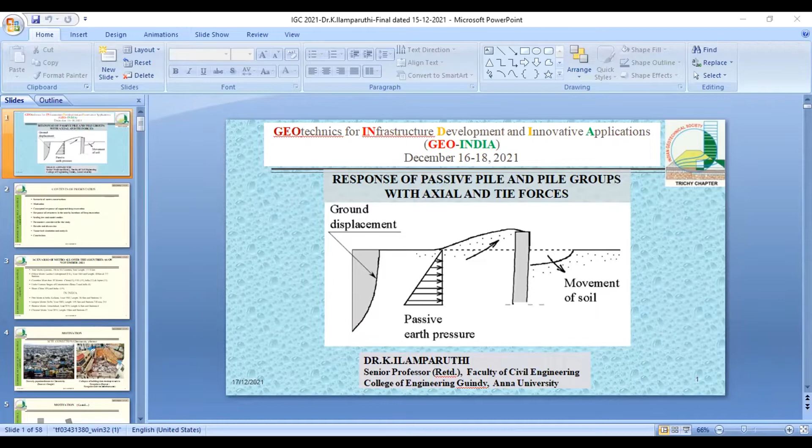Can you please check the screen, sir? Which screen you want? Otherwise, you can share your whole window. Then you can open the PPT in the full screen mode. In the share option. Can you see the presentation now? Yes. From there you start the show mode. Now can you see full screen? No, it's not coming. What I suggest is you go ahead with your lecture. We can enlarge the screen to see your slide full on our screen. Okay, this might help a lot. Can you see the full screen? Yeah, now it's fine. Okay, now please continue.

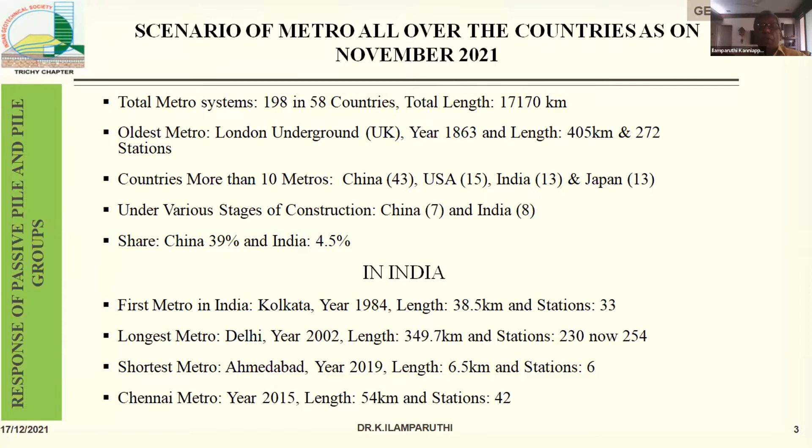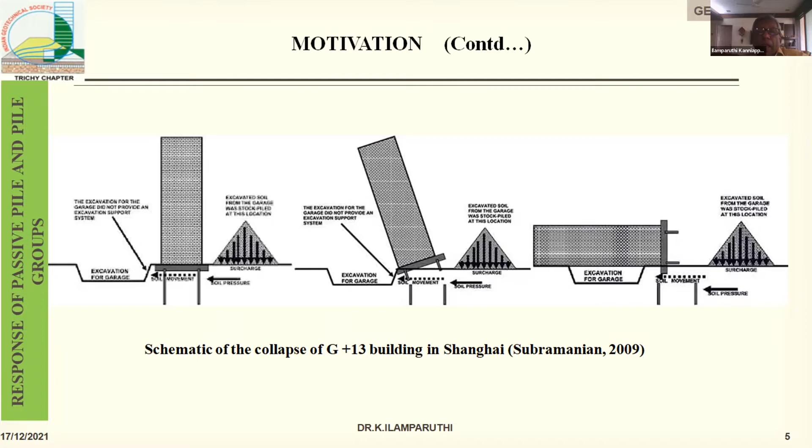And then in Chennai, during the time of construction of the metro, on a weekly basis, there was a lot of news in the paper about the problem. Metro rail tunnel has damaged 300 plus buildings since mid-2012. Similarly, there was another report that Tamil Wesley Church, a 152-year-old church, has given away. And then I had the chance to advise the owners of the church.

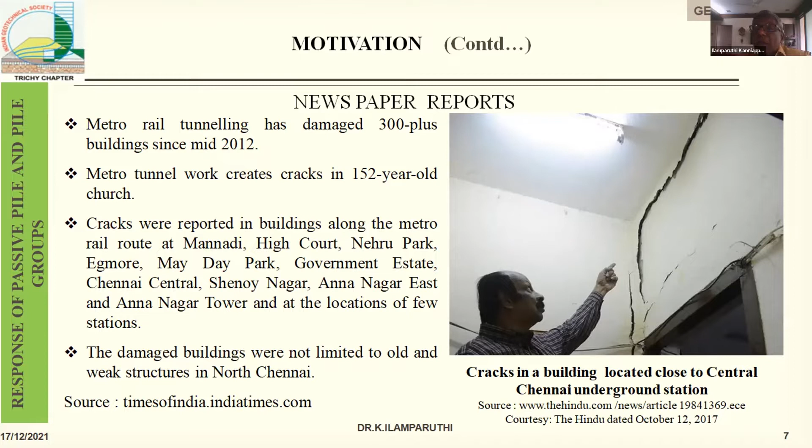I had an opportunity to offer my support through the subcontractor. This is the building. It is a ground plus first story building. In order to drive the sheet pile wall for protecting the building, initially they were not able to drive the pile because the soil is hard on the top layer. They drilled a hole to a depth of about 5 to 6 meters for the purpose of driving the sheet pile wall. The initial crack was formed on the floor, and then the soil exhibited the failure as shown here.

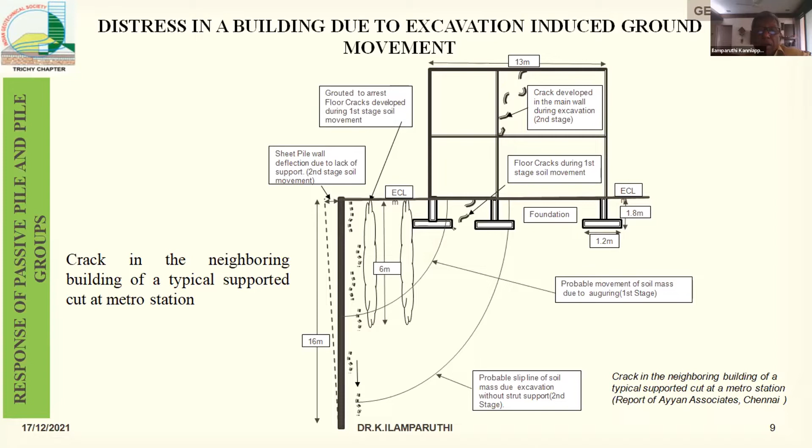It is a probable movement of soil mass due to augering as a first stage. Without having proper knowledge, they have grouted the soil to a depth of 6 meters without giving any prop or strut to the sheet pile wall. Sheet pile was driven and excavation was commenced. Again, you see the probable slip line of soil mass due to excavation without strut support during the second stage. These are all the reasons that have motivated us to study the performance of passive piles.

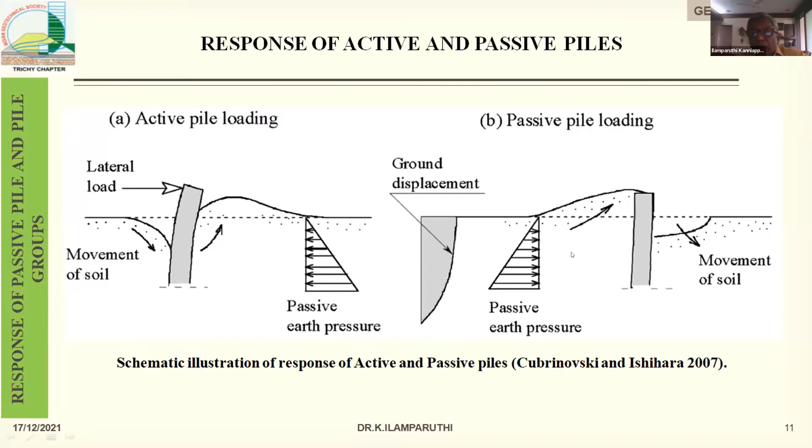This is the figure which shows the ground displacement on one side, but really the problem of deep excavation is, we are going to excavate here. Therefore, there is going to be a stress reversal. Whatever is shown here, it is going to be totally reversed.

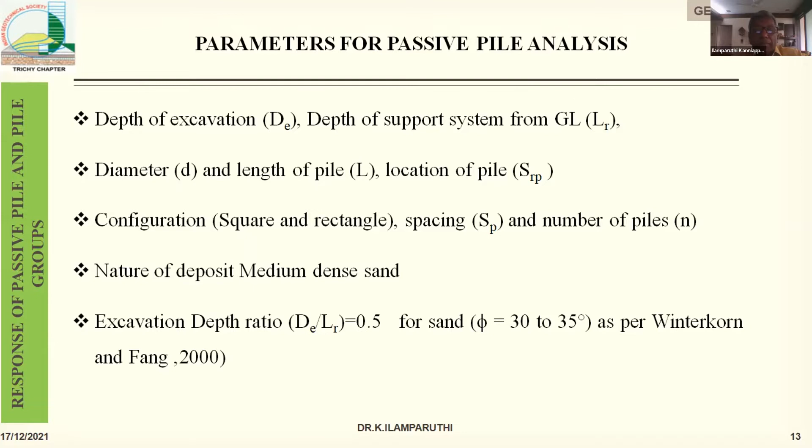We all know there is a scaling problem in case of 1G model. The stiffness of the soil pile system depends upon the stress. The stiffness is equal to sigma to the power alpha. Wood suggested a model. He has given the stiffness response EM by EP is equal to 1 by n power alpha, sorry, this is going to be 1 by n power alpha from the experimental findings of 1G model as well as the prototype. With the experimental evidence, he recommended that alpha value can be used as 0.5 for sandy soils, and for clayey soils, alpha value can be used as 1.

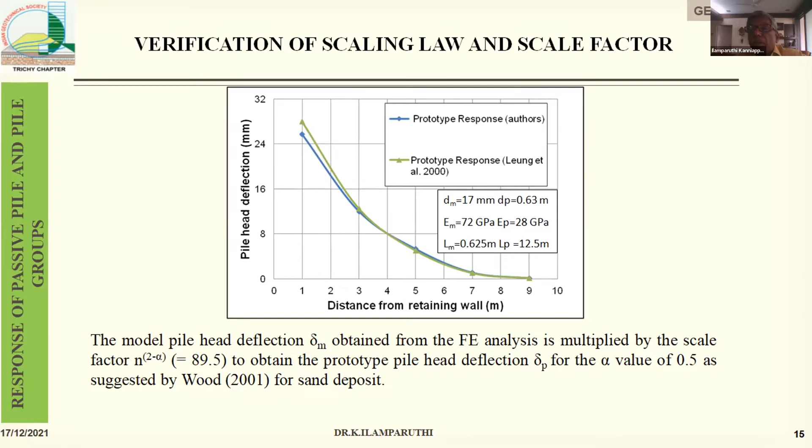The test was conducted in a medium dense sand with a relative density of 59%. The average unit weight of soil is 16.5 kN per meter cube, and the angle of shear resistance is 35 degrees. Now, I will be presenting the single pile and pile group response one after the other.

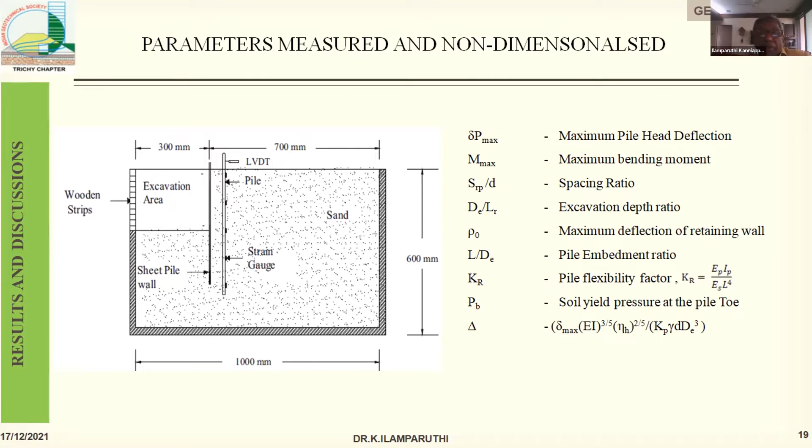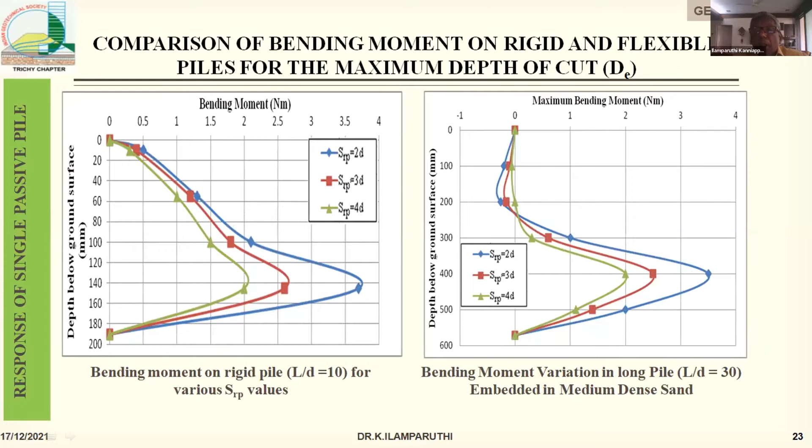This is the bending moment variation of the short pile as well as the longer pile. The bending moment is maximum very close to the bottom of the excavation, irrespective of the spacing of the pile. The closer the location of the pile to the sheet pile wall, the higher the moment than that of the pile away from the sheet pile wall, irrespective of the L/D ratio of the pile.

Now, the normalized moment has been represented in another way, that is the ratio between the spacing of the pile to the length of the pile. From this, we can see that the moment is reduced with the increase in the spacing distance. However, if you look at the figure carefully, the moment is the same for a given ratio of SRP versus DE.

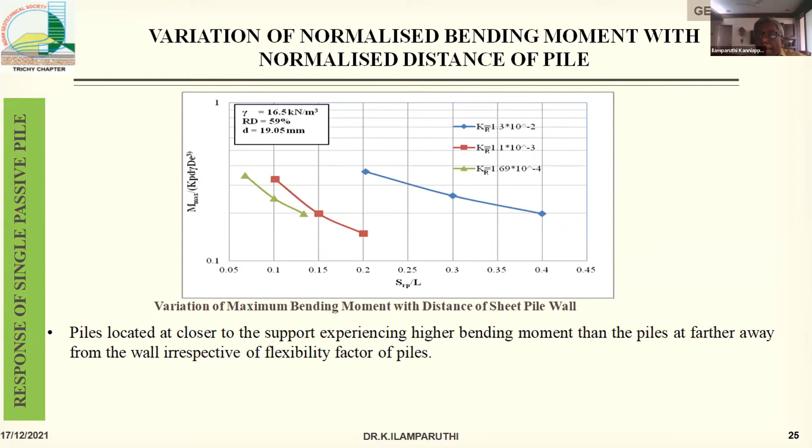It means the front row of piles is in the active wedge zone, whereas the rear pile is away from the active wedge zone. Therefore, the front pile acts as a shadow to the rear pile, whereas the rear pile supports the front pile through the pile cap.

The rear and the front piles are complementing each other. Because of that, the deflection of the pile is...

You have 4 more minutes.

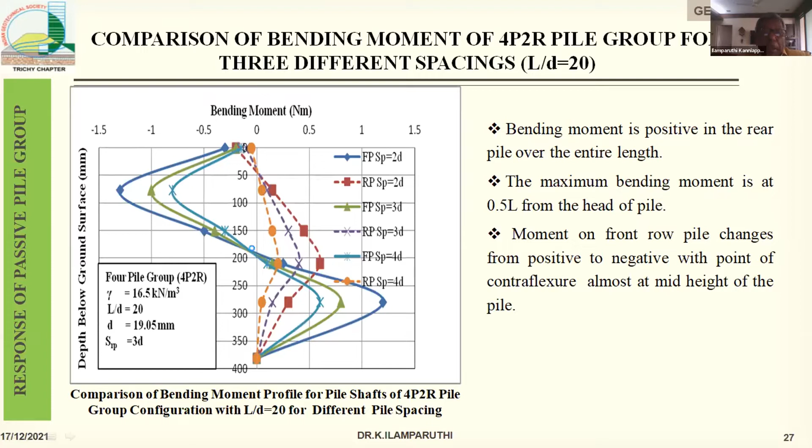This is the moment variation of the pile group. The front pile has a moment variation, particularly the top part, the moment is negative, whereas in the rear pile, the moment is positive. The contraflexure point is very close to the depth of excavation in case of the front pile.

Now, this is the effect of number of piles, both in displacement and the moment, as well as the ratio of maximum positive to maximum negative moment. With increase in number of piles, the moment in each pile of the group reduces when compared to the moment of the single pile.

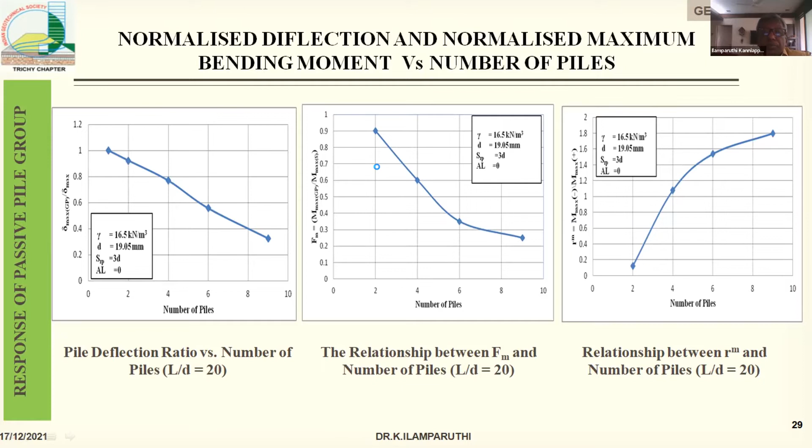The deflection of the axially loaded pile is more than that of the pile without axial load, because the shadow effect of the front pile is reduced, and the pile has a tendency to rotate or deflect when the axial load is acting on the pile.

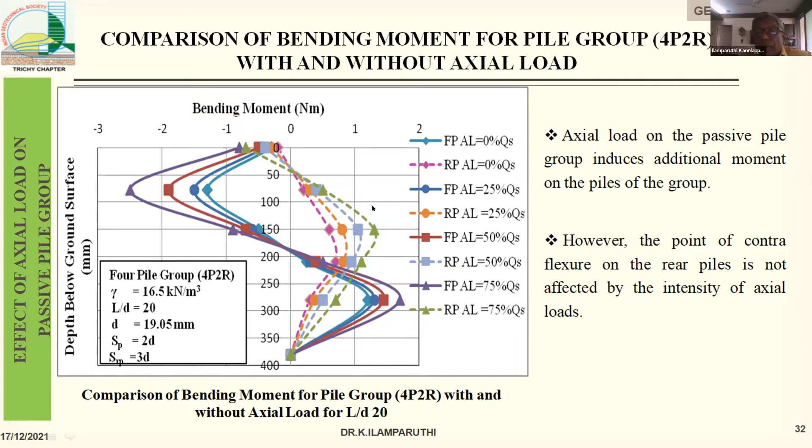This is the moment variation of both the front pile and the rear pile. Due to the axial load, the negative moment increases, and the positive moment also increases when compared to that of the pile without axial load.

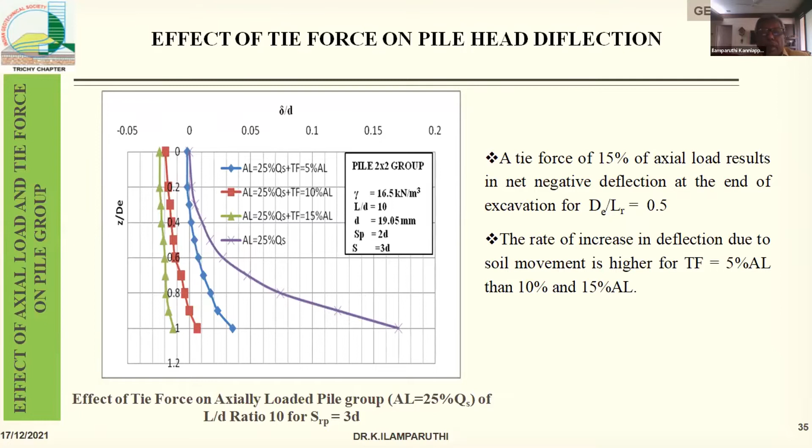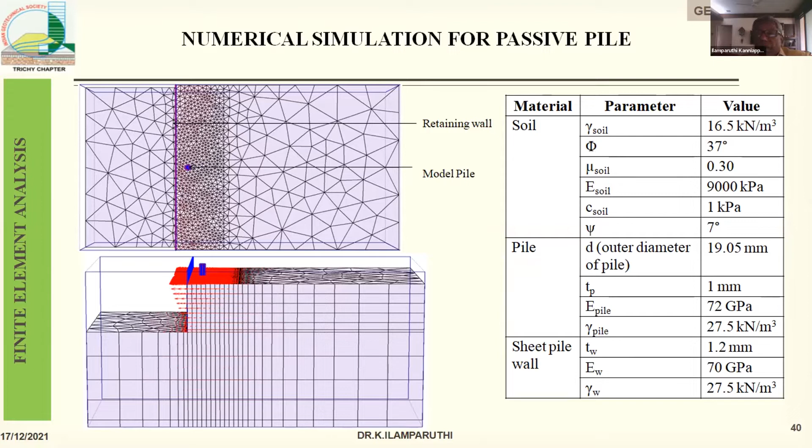The numerical analysis has been simulated using a PLAXIS 3D model. Mohr-Coulomb material has been used for modeling the soil mass. The major problem is selecting the modulus of the material. We conducted a light cone penetration test and compared it with the standard SPT N values. Finally, we adopted the E value obtained from the plate load test.

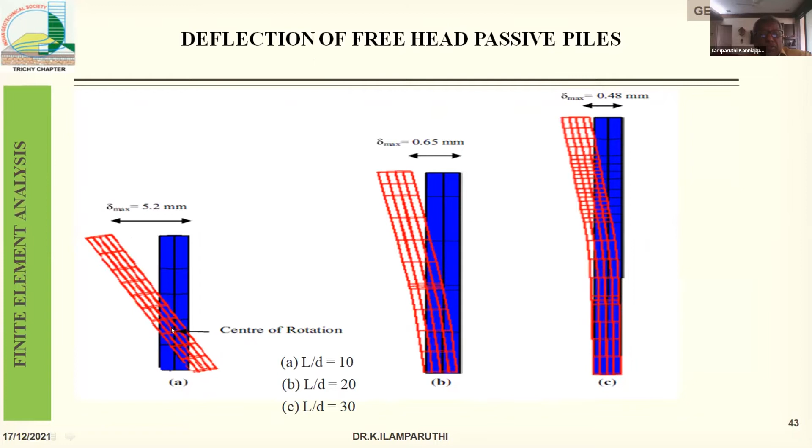This is the response of the pile due to the soil movement. The rigid pile fails by rotation. The longer pile deforms as a cantilever beam. The bottom part of the pile below the cut remains almost vertical because of the higher passive resistance. This is the primary strain zone. This is the secondary strain zone.

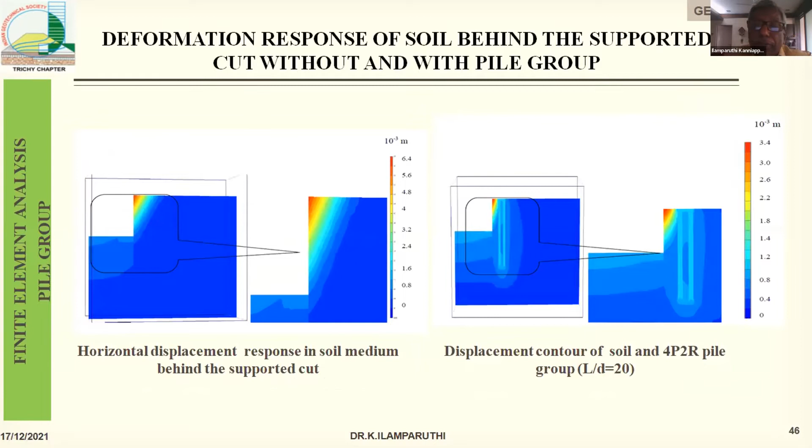Finally, when the piles are placed beyond a distance of 0.6 times DE, the ground movement has no influence on the deflection or the bending moment. What is the takeaway? In case of passive piles, if they are within a distance of 0.6 DE, they will be subjected to displacement, and the bending moment is also going to be more. When the pile location is beyond 0.6 DE, the influence of the ground movement is very limited.

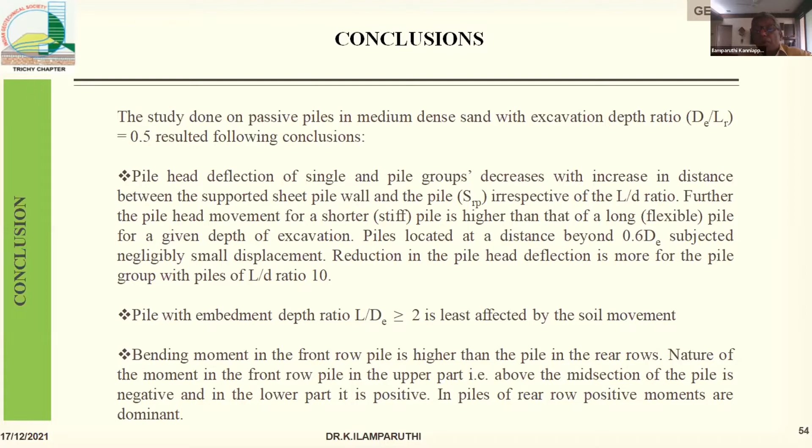When the pile length is going to be more than twice that of the depth of excavation, then the soil movement is not having much influence. The tie force is totally changing the stress system. Thereby, the deflection of the pile is almost nil, or there is going to be a negative displacement.

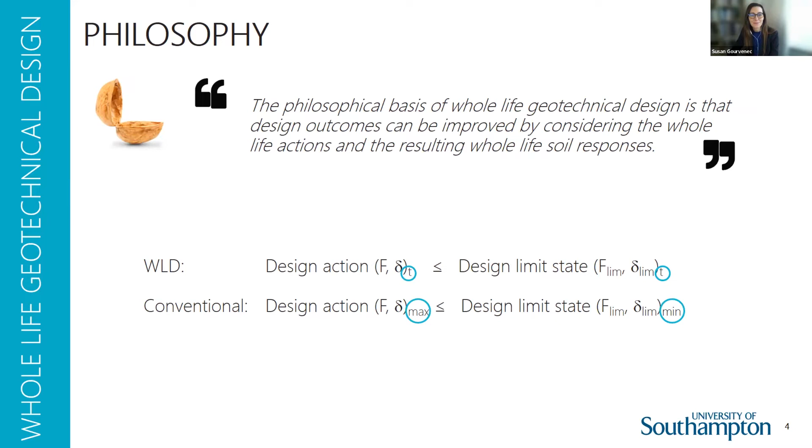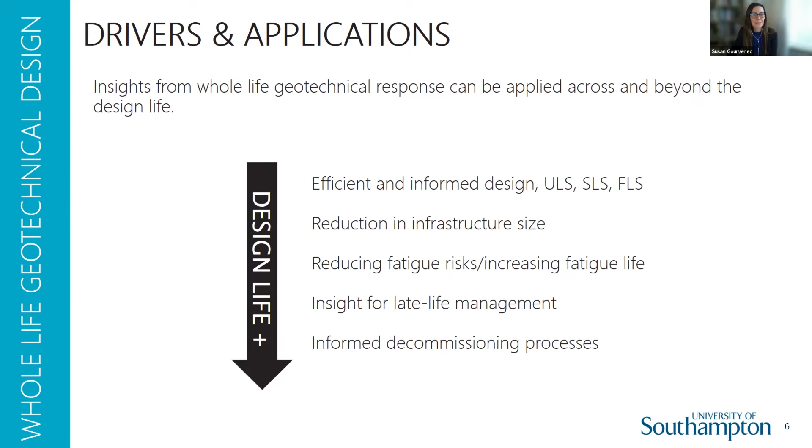Now, the soil responses that could cause changes in resistance and stiffness over time can be due to various factors, including consolidation, due to changes in applied load, whether they be monotonic or cyclic, sediment transport, so scour and erosion, leading to a change in the seafloor profile, or cyclic strain, ratcheting, for example, accumulation of deformation under cyclic actions.

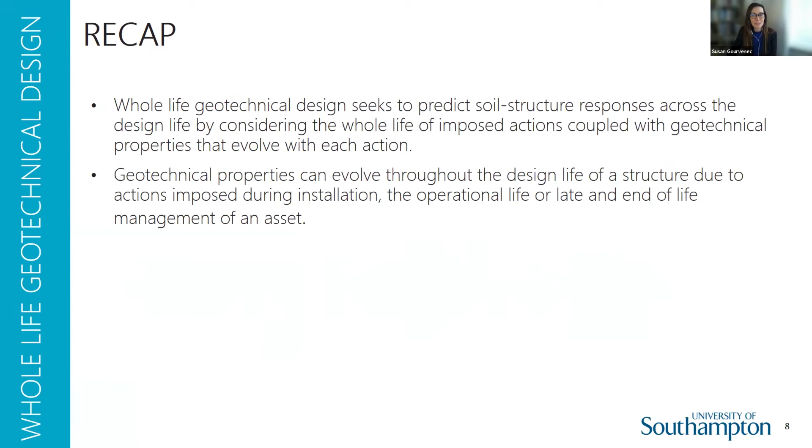So just to recap, whole life geotechnical design seeks to predict soil structure responses across the design life by considering the whole life of imposed actions coupled with geotechnical properties that evolve with each action. The geotechnical properties can evolve throughout the design life of a structure due to the actions that are imposed during installation, the operational life, or late and end of life management of an asset.

Whole life geotechnical design checks limit states at different stages of the whole life against the current geotechnical properties, which are updated based on the processes that have occurred and the responses that have accumulated earlier in the design life. And consideration of whole life geotechnical response provides greater insight, enabling forecasting of the response of a supported structure through and beyond its design life.

So why do we need whole life geotechnical design, and why now? There has been an established offshore sector for oil and gas for more than 60 years. Some 5,000 oil and gas platforms and structures have been installed in oceans globally, and generally without much issue, suggesting that offshore geotechnical design practices are okay.

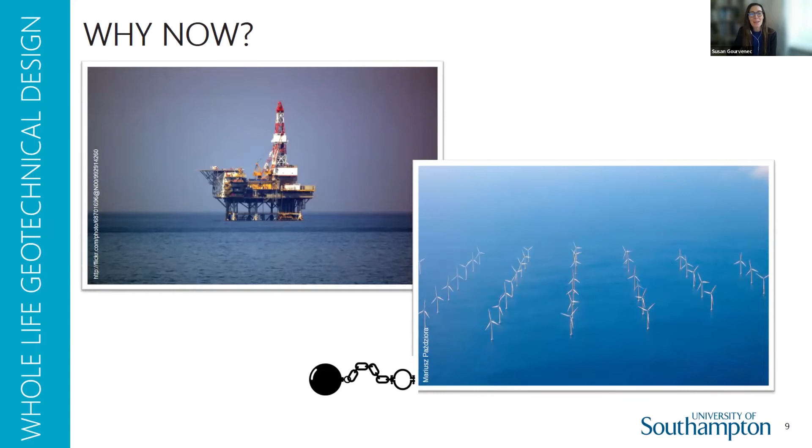But the transition to renewables has seen an acceleration of installations in the oceans, more in the last decade than in the 50 years before that, and with a much lower return on investment than for hydrocarbon facilities, because more structures are needed for an equivalent energy yield.

So designs must become more efficient or optimized and appropriate for the shift from bespoke individual platforms carrying a crew and hazardous materials in the hydrocarbons industry to developments of tens or hundreds of self-similar structures without a crew or hazardous substances for renewables.

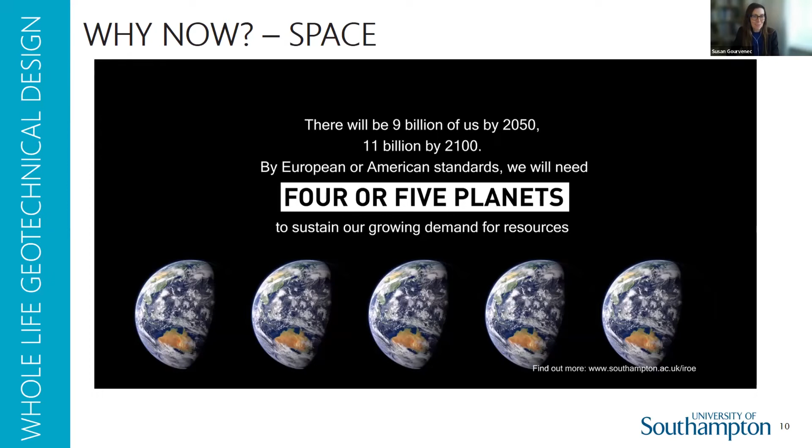And people are increasingly looking to the oceans as a strong renewable energy resource and as a place with space for development. With a population forecast to increase to 9 billion by 2050, 11 billion by 2100, it's been suggested that without changes in our behaviours, we will need 4 or 5 planets to sustain our growing demand for resources. And oceans covering 70% of our planet are often seen as an empty space for this development, although arguably oceans are full and busy places supporting ecosystems that ultimately support us.

So there is a diversity of industries moving to the oceans that have lower return on investment than oil and gas, not just fixed and floating wind, but tidal and wave energy, and also cables networks for communications and power. 99% of internet traffic travels along submarine cables. There is also floating solar, potential for greater aquaculture, and industrial applications, for example, floating ports or new concepts of energy islands, and even urban uses of offshore space for seasteading.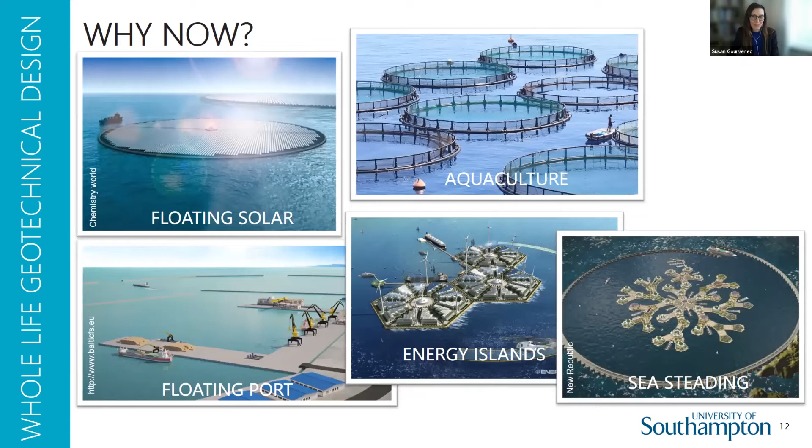Now, considering just the UK outlook from where I'm based, there are various projections for offshore wind provision by 2050. The UK 6th carbon budget sets out a range of scenarios indicating between 90 and 140 gigawatts of offshore wind by 2050. This corresponds to a build rate of up to 5 gigawatts a year, or approximately 1 offshore wind turbine built every day for the next 30 years.

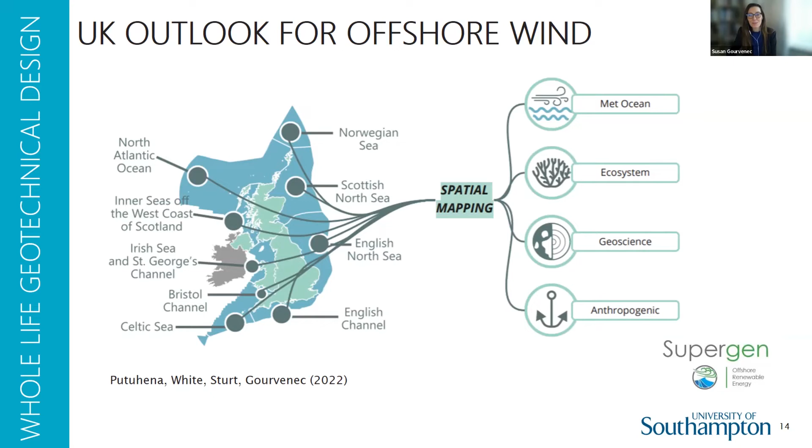And there is a challenge of where to put the structures to deliver the necessary capacity. And at Southampton, we're carrying out a project looking at existing and forecast constraints in terms of offshore wind farm development, whether those constraints be metocean or ecosystem, geoscience or anthropogenic. And while the oceans are big, the most accessible bits can be quite congested or home to significant or endangered ecosystems or difficult metocean or geoscience conditions. And there is a similar outlook in many regions.

Globally in 2021, there were more than 5,000 offshore wind structures and a touch under 3,000 oil and gas structures in our oceans and seas, and an exponential increase forecast for wind in the coming decades. So this study from Southampton collected a data set of historic, current and forecast offshore hydrocarbon and offshore wind infrastructure globally over the period 1960 to 2040,

and we've presented it on an interactive GIS map against a backdrop of offshore renewable and hydrocarbon resources. And that map is freely available alongside the open access paper. And the data shows a shifting loci of offshore activity in the coming decades. And the paper explores some of the tensions of balancing the economic, environmental and social needs in current regulatory frameworks.

And wherever all this infrastructure will be, it must be secured to the seabed efficiently and effectively. And this is achieved by a range of foundation and anchoring systems, and often in very variable geotechnical conditions.

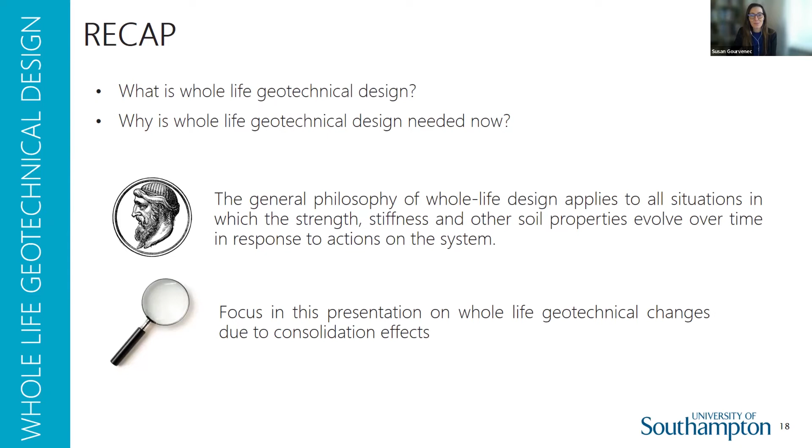And it is well established that undrained cyclic loading leads to softening due to the buildup of those excess pore water pressures. And consolidation, so dissipation of excess pore pressures and reduction in void ratio, leads to increases in undrained shear strength of a soil. And in sequence, these principles form the basis of whole life geotechnical design with consolidation as a driver.

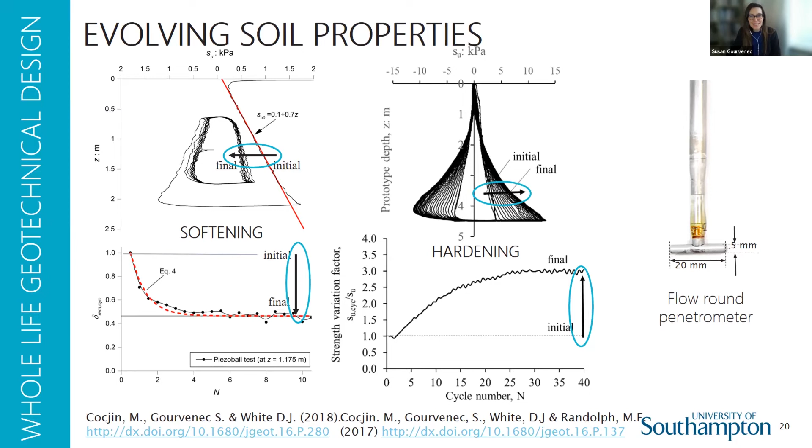But for the presentation, we need to move on now to have a look at how to move from observations and measurements of whole life soil response to a design method. And this requires the identification or development of building blocks to capture and accumulate the individual processes, and a practical method for identifying the necessary input parameters to the calculation tool or framework.

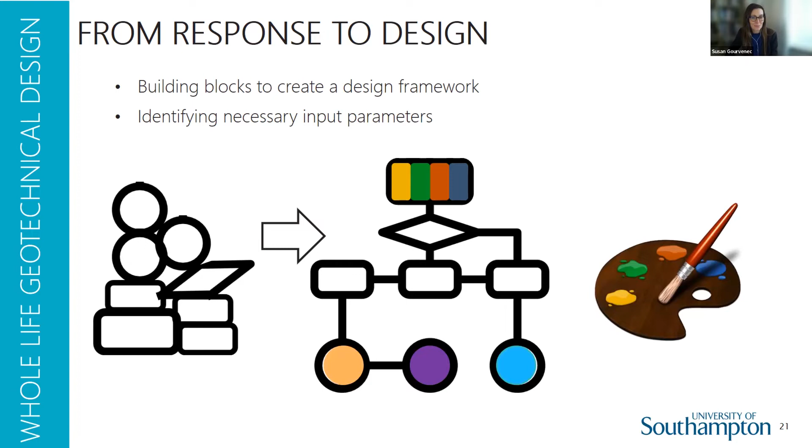And I'm going to talk about 2 different styles of macro model that have been developed and that can be used to apply whole life geotechnical design to a range of boundary value problems. And both of these methods use critical state soil mechanics principles as the building blocks, since critical state soil mechanics neatly relates changes in stress, excess pore pressure, and changes in volume, and hence strength, stiffness, and coefficient of consolidation.

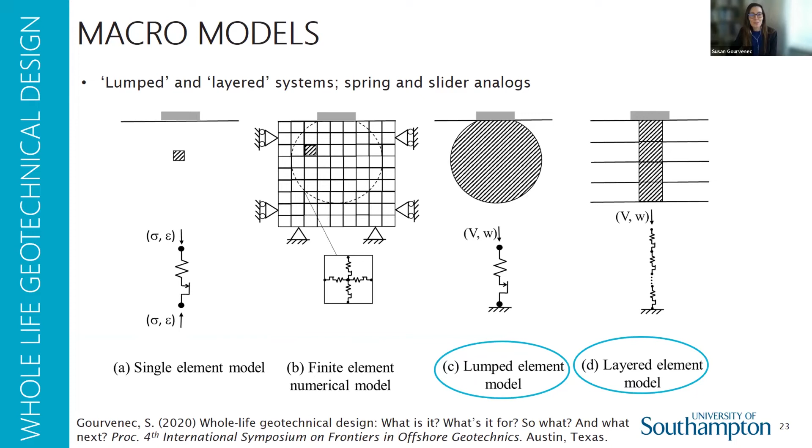So considering a simple case of a shallow foundation under vertical loading, self-weight consolidation can lead to a doubling of the initial undrained shear strength close to the underside of a foundation, decreasing with distance from the foundation. So the question then is, how do you determine the operative shear strength that will govern the foundation performance under the subsequent load path?

So results from a suite of finite element analyses investigating the effect of relative preload, degree of consolidation and over-consolidation ratio show consolidated undrained vertical capacity of strip and circular surface foundations can be predicted by a simple lumped element critical state model, where the increase in capacity can be described by a simple linear function of known parameters: R, the normally consolidated undrained strength ratio, su over sigma'v; VP, the applied preload, i.e. the self-weight; and NcV, the vertical bearing capacity factor for undrained, unconsolidated conditions. So F sigma and FSU are the stress and strength factors that account for that non-uniform distribution of stress and void ratio change over the region.

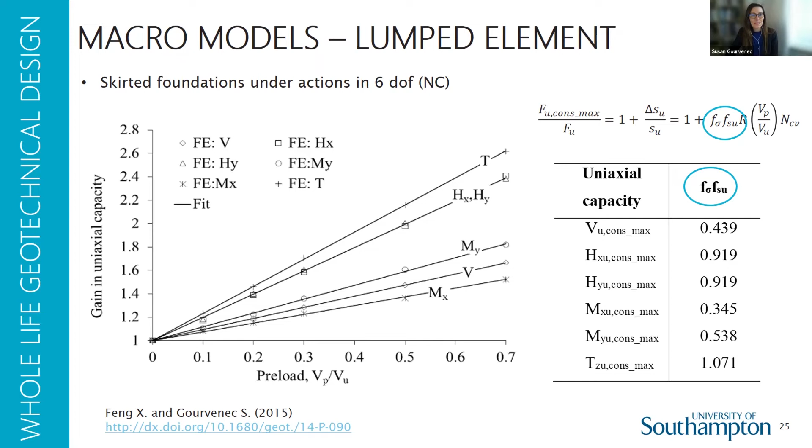So critical state soil mechanics can be directly applied to lumped or layered zones to create a macro model for a boundary value problem if the representative stress state can be reasonably estimated, such as for shallow foundations and pipelines or other near surface infrastructure.

For embedded structures, the representative stress state is not so straightforward to design, and hence deriving the effective stress to define the changes in void ratio is not straightforward. And so in this situation, a critical state inspired approach can be adopted using proxies of damage or softening and hardening to represent excess pore pressure generation and the dissipation leading to the change in void ratio respectively.

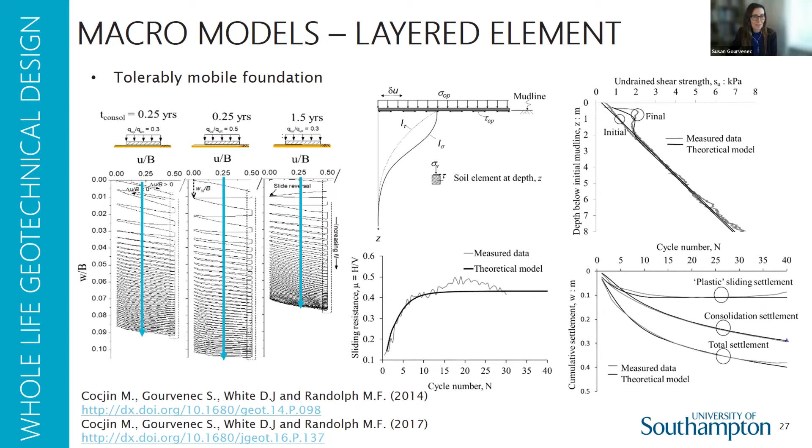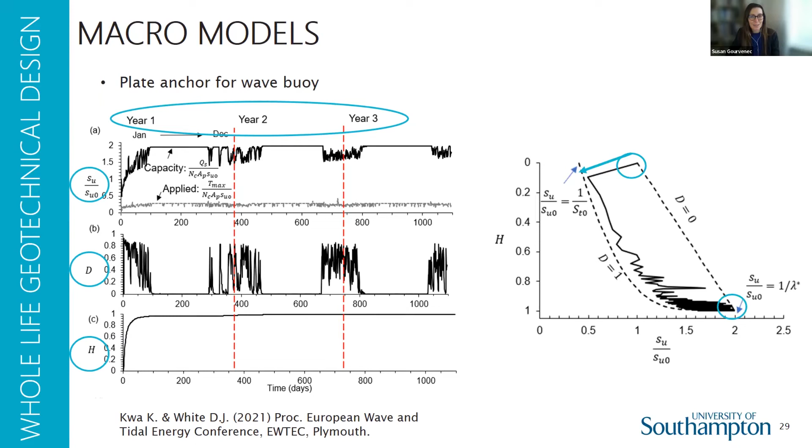So alongside a computational framework, a practical method of determining the necessary input parameters is also needed. So the examples I showed at the start of the presentation of softening and hardening using the full-flow penetrometers, these give good results, but they are not very practical for routine use, as they either need to be deployed in situ offshore at great cost, or sufficient material needs to be retrieved and sampled to enable centrifuge model testing and possibly large deck side tests.

So some recent work at Southampton has shown that using direct simple shear element tests can demonstrate evolution of strength, stiffness and coefficient of consolidation necessary to capture the parameters needed for the critical state whole life geotechnical design framework. And some ongoing work is investigating the effect of packets of pre-failure cyclic shear with intervening consolidation, and we'll present those results in a paper next year.

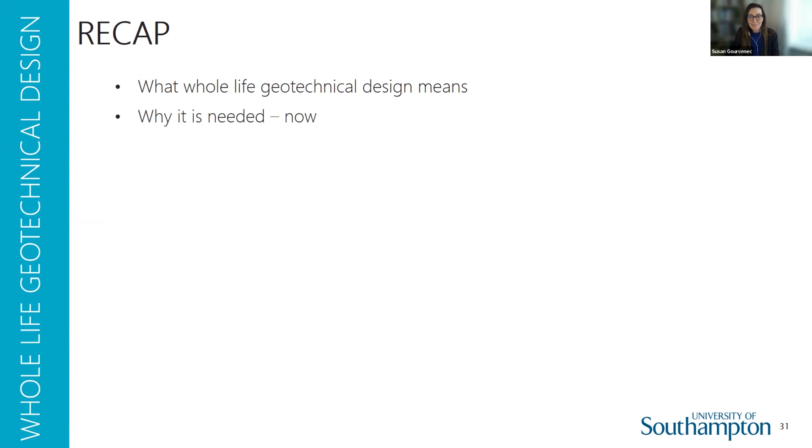So just to recap again, we have had a look at what whole life geotechnical design means, why it is needed now, some of the theory underpinning the fundamental building blocks of whole life geotechnical response, development of macro models to do preliminary design calculations, and applications to various boundary value problems.

So what else is needed to enable whole life geotechnical design to be adopted routinely? Well, I touched on site characterization and practical protocols for deriving necessary input parameters for whole life geotechnical design. We also always need ways to define whole life actions and then to measure or monitor those actions continuously to improve definition. Calculation tools need to be accessible so engineers can use them. And an example is the freeware web apps that I host.

Verification via field data will be essential to build confidence in adopting whole life geotechnical design. So operators need to come on board and collect and share performance data. And for widespread adoption, formalization of guidance is needed, so incorporation in international standards.

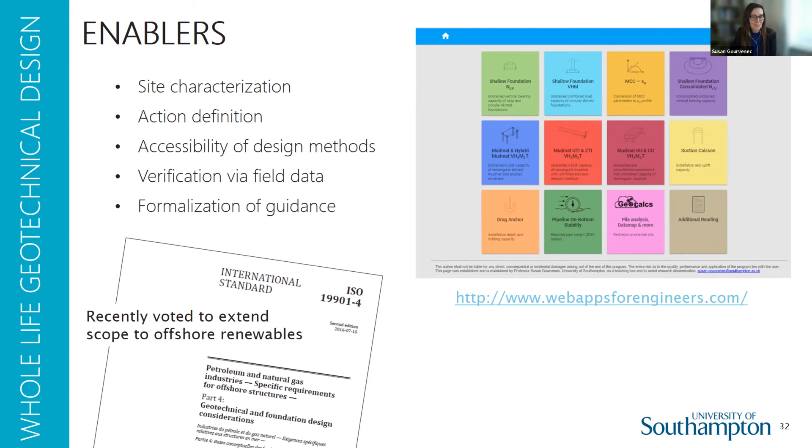So looking forward, the oceans are being industrialized at an unprecedented pace and scale, and technology and geotechnical engineers do have a vital role to play. Efficiency and optimization of geotechnical design is essential to enable the offshore renewables transition necessary to support decarbonisation of the global energy sector. And whole life geotechnical design has an important role to play.

But we should focus our minds not just on what we can do to deliver the competing demands of growing population and reduce CO2 emissions, but also on ensuring that we do this as responsibly as we can, using technology to monitor the impact of our interventions on the oceans to inform better decision-making going forward. And there are a couple of articles on this open access site, The Conversation, that you could take a look at if you are interested.

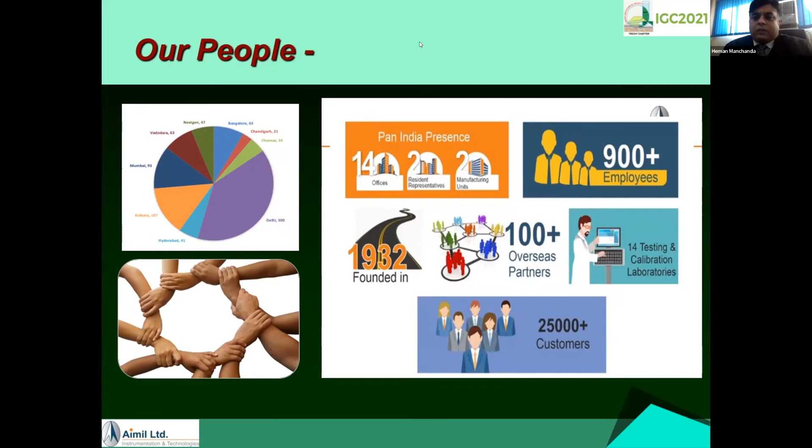This is our presence in India. You can see that we have our offices in almost all major cities of India to cater to the needs of local customers over there. And the manufacturing units are based in Delhi and Noida. These are our partners. We have partnered with all of them to provide exclusive services and supply in India.

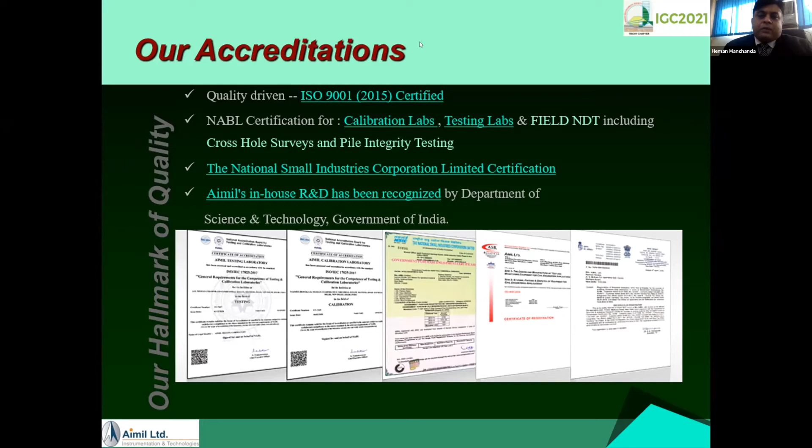So again, we are an ISO 9001 company. We have calibration labs, testing labs, as well as a field entity, which includes carrying out cross-hole surveys, pile integrity testing, and non-destructive testing of concrete. All these activities which we do in the field are also covered under the NABL umbrella. In fact, we are one of only a few companies in India who have NABL for field testing services. We are also registered under the National Small Industries Corporation, and we have our in-house R&D lab, which is recognized by the Department of Science and Technology, Government of India. There is a list of services which we provide.

So today's focus will be on civil engineering consultancy services, and I am myself in that same department, which provides consultancy services in civil engineering. This is called the Advanced Technology and Engineering Services Department of Aimil Limited. The department was started by Dr. V.M. Sharma, and today we miss him, sir.

He very recently passed away, and I request all of you to give a minute of tribute to him once we are finished with this.

Dr. Sharma took the lead role in starting the consultancy division of Aimil Limited in 1995. Since then, we are just running without any stop. We provide consultancy services in almost all areas which infrastructure requires. We do investigations and testing for desktop studies, feasibility studies, DPRs, and detailed design. We have our own design and data analysis department for geotechnical engineering. Then we do instrumentation and monitoring of structures, and we also do non-destructive testing of built structures.

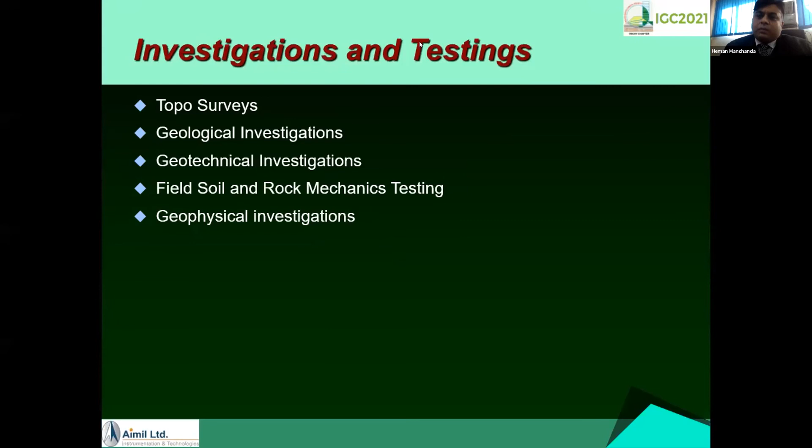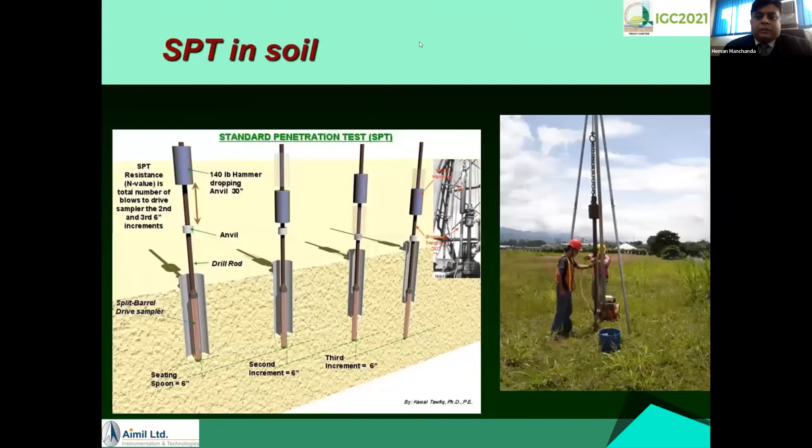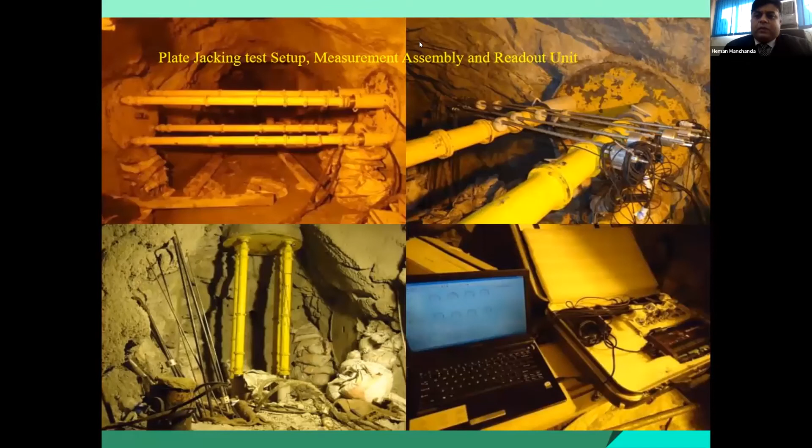In geological survey, we do geological mapping of the area and prepare the geological sheets to the scale required by the authorities. In geotechnical investigations, we do PLT tests at site, SPT in soils and other tests. We also do direct shear tests in the field, concrete to concrete as well as rock to rock interface. We do DST with the different load combinations required by the client. We also do plate tests required for the design of underground structures, and field tests. All the pictures shown are our actual tests executed in India by our company.

So I'll hurry because the time is short.

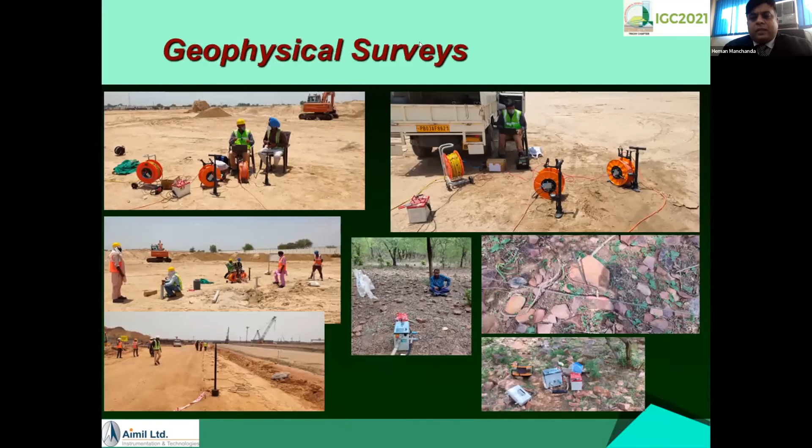We have our in-house NABL accredited lab to do all the tests. In geophysical surveys, we do ERT survey, seismic reflection survey, tomography, and many other things. Coming to design and analysis, we get associated with various infrastructure projects both during the tender stage, to help contractors prepare their tender bids, and for detailed design analysis.

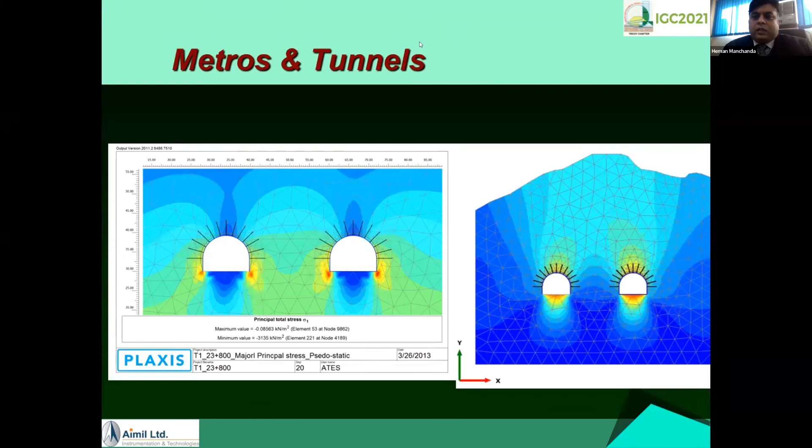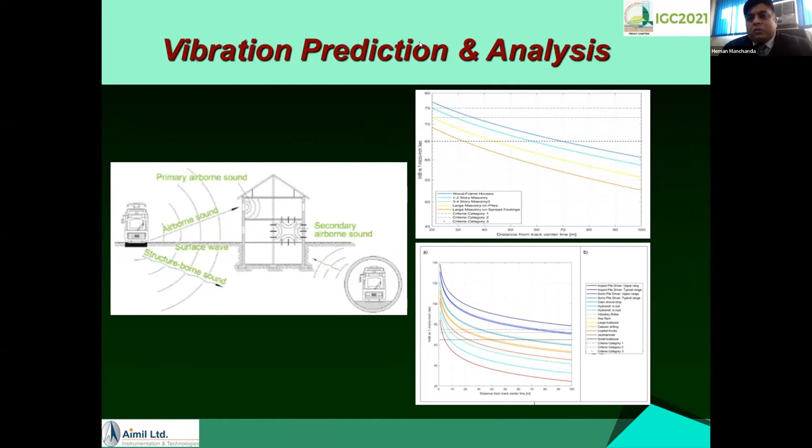We were doing vibration monitoring for long, but for the first time, for our Chennai Metro client, we did vibration analysis and prediction of the expected vibration levels at different points due to tunneling activities, and then we also monitored it to verify it. We do building risk assessment and building condition surveys for underground infrastructure construction. These are some of the works which we have done.

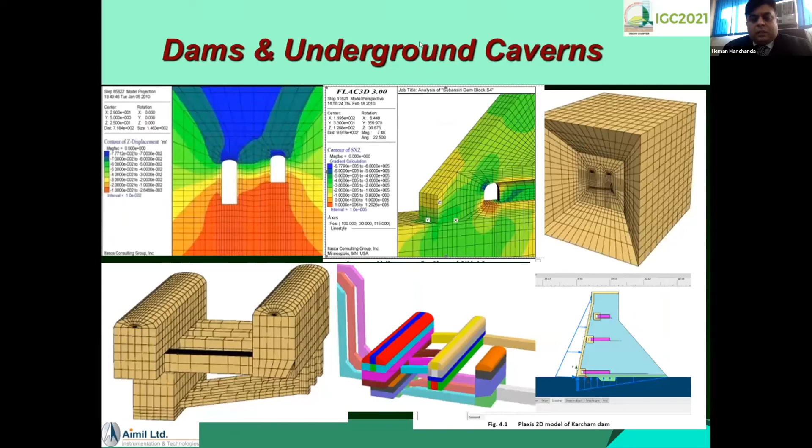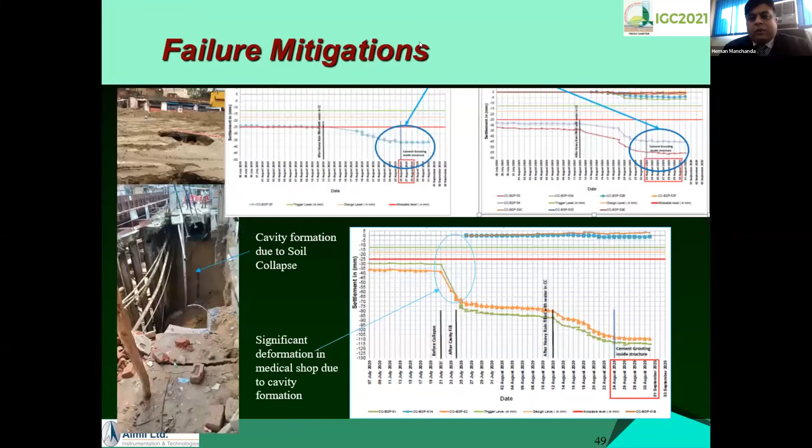We have also done projects for slope stability analysis using both limit equilibrium analysis and finite element techniques. We have modeled 3D as well as 2D analyses for underground powerhouse caverns and the complete associated tunnels. We have also been associated with failure mitigations, like this slope failure mitigation, where we provided a solution. There was a failure in an underground construction; we analyzed all the monitoring data, found the reason for failure, and provided a solution using micropiles to prevent further settlements of the associated buildings and further deflections.

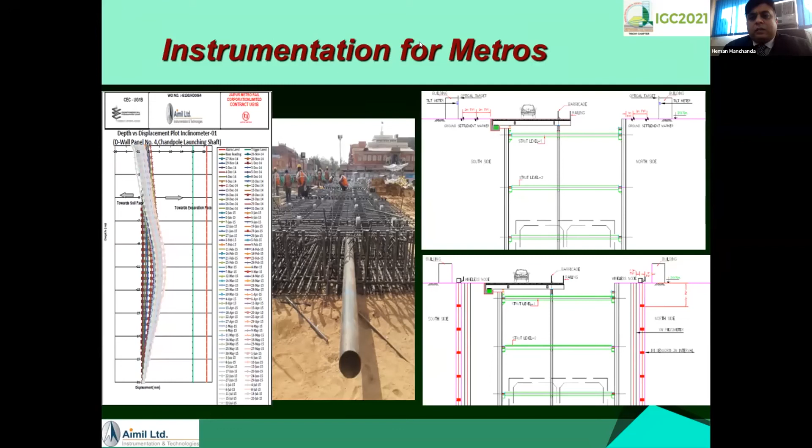Once we have designed the structure, we also get involved in instrumentation and monitoring. This is the instrumentation we have done for underground D-walls and metro structures. We have done instrumentation for landslides using both geotechnical and survey techniques. And we have also done instrumentation and monitoring for some bridges nowadays.

Amanda, can you give me, please, yeah. Just give me one more minute.

I'll surely wind up. So this is the real use of instrumentation, once people get on-site visualization and alarms.

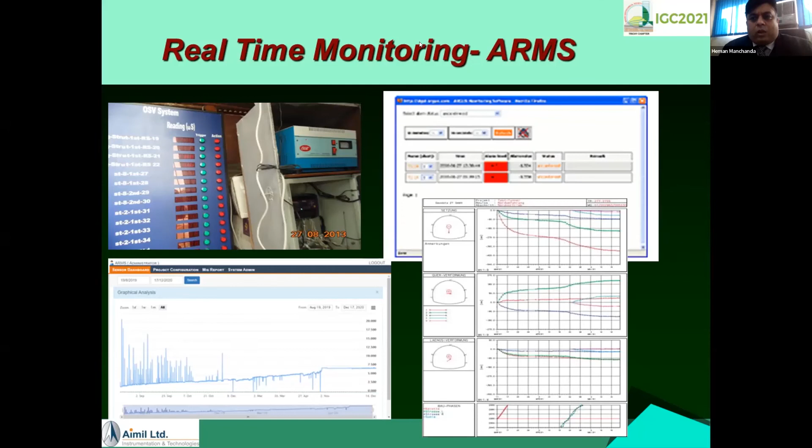Otherwise, just recording and analyzing afterwards probably is not going to help. So we have developed our own in-house software called ARMS. So as I discussed, we do cross-hole and pile integrity testings, all for underground and elevated metros, all covered under the NABL umbrella. So maybe I'd like to close here because of time, but in short, I'd like to say that we in AIMIL Limited are not only an instrument selling company, but we are a geotechnical consultancy company who provide consultancy services to external as well as internal clients.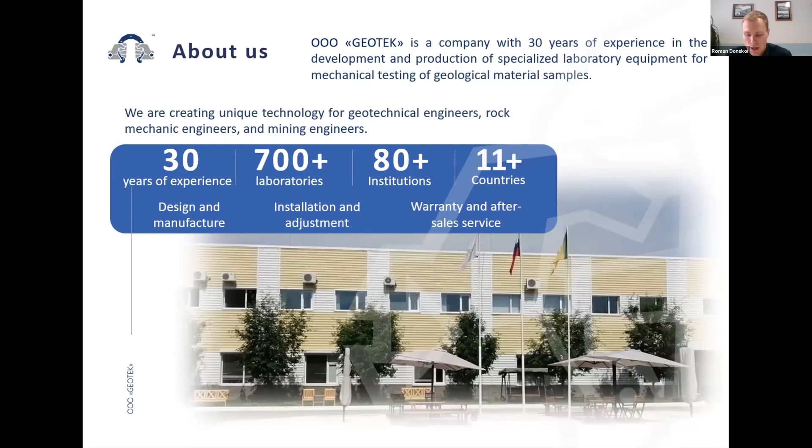My name is Roman Donskoy. I am international business development manager in this company, and I would like to present our company. So I will start that we have 30 years of experience in development and production of specialized laboratory equipment for mechanical testing of geological material samples. We are creating unique technology for geotechnical engineers, rock mechanical engineers, and mining engineers. So also I would like to add that our clients are firstly academic and research institutes, and specialized educational institutions for training geotechnical engineers, geological engineers, and mining engineers.

Here's the range of our equipment. We have ProLine, SPEZline, and Standard Line. I will explain shortly about ProLine and SPEZline because it could be interesting for everyone, I think. So ProLine is a project composed system which is completed according to an individual order depending on the user's needs. This line consists of a power device with a capacity from 2 to 500 kilonewton, pressure volume controllers with the ability to create a pressure from 1 to 70 MPa, testing cells and devices, a modular control and measurement system, so software based on a PC. Here are some examples of our products. This is ProLine systems.

It ensures the execution of tests with a high level of automation and also provides convenience in preparing for tests due to additional devices and mechanisms. Measurement instruments have high resolution and accuracy in a wide range of temperatures and pressures. The control system allows you to manage load in real time with a high frequency of data updates. This makes it possible to implement such load modes as static, kinematic, dynamic, with stress and strain control. The hardware and software security system minimizes the loss of data and samples in the event of emergency and also ensures safety during the operation of the complex.

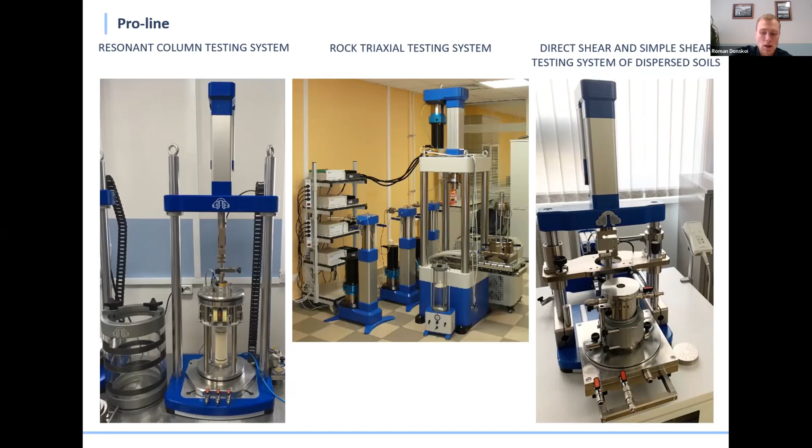Another one, this is SPEZline. This we call apparatus, so it's like big systems that mostly are done for some special issues. So when our users are faced with complex tasks that cannot be solved with typical solutions, we offer specialized systems, SPEZline, that perform complex specialized tests with increased requirements. SPEZline systems are applicable for solving complex geotechnical problems in the development of underground space in the construction and mining industries. Distinctive features of SPEZline systems are high reliability and functionality for the implementation of the test method, which often does not have a standard.